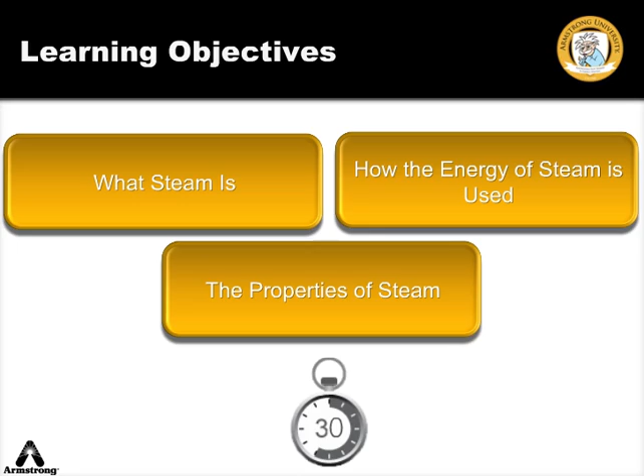Taking full advantage of the steam utility depends on a thorough understanding of its potential and properties. The more you know, the greater the benefit you'll enjoy. To say it another way, the more you know about steam and how to control and use it, the greater the return on the investment in a steam system.

Our journey towards understanding steam begins. Click play to continue.

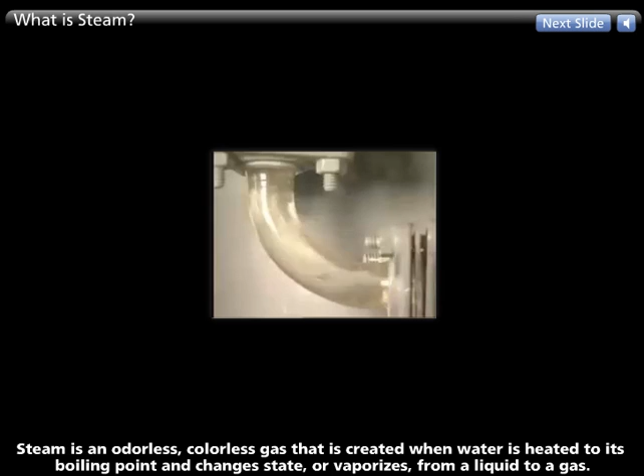Steam is an odorless, colorless gas that is created when water is heated to its boiling point and changes state, or vaporizes, from a liquid to a gas.

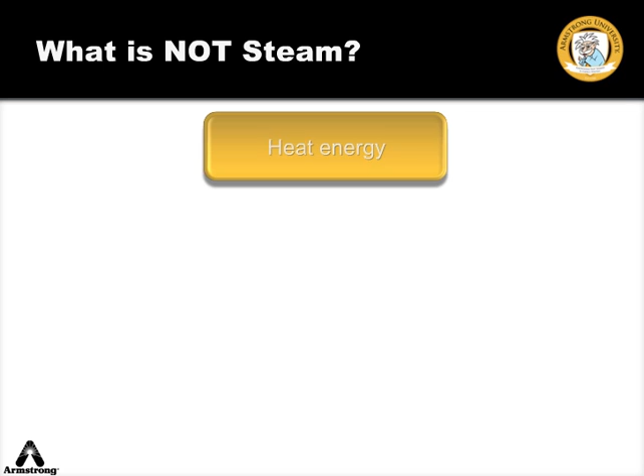When heat energy is removed from steam, it loses its ability to retain a gaseous state and condenses back into a liquid. The resulting liquid is called condensate. The process of condensation happens quickly. The temperature at which condensation takes place is known as the dew point.

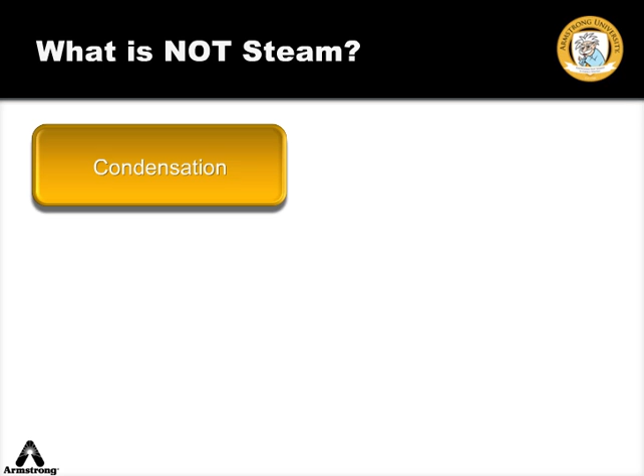There are various forms of condensate that are sometimes incorrectly referred to as steam. These forms, however, lack the molecular makeup of a gas.

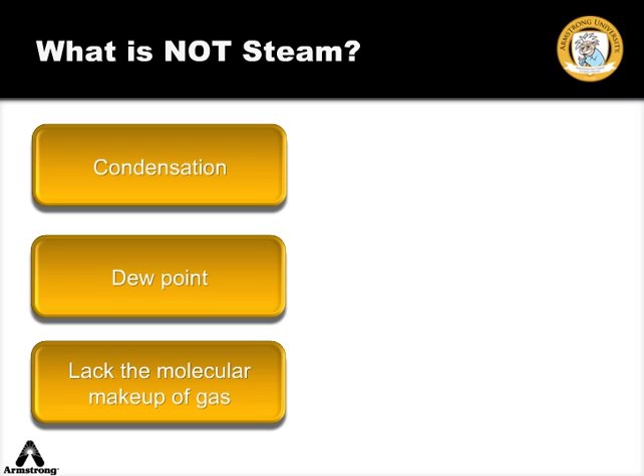Some examples of these are the mist you see rising above relatively warm water on a cool day, which is in fact water vapor condensing in the air. The droplets on your bathroom mirror are formed when water condenses out of the relatively warm air onto the cooler surface of the mirror. Click play to continue.

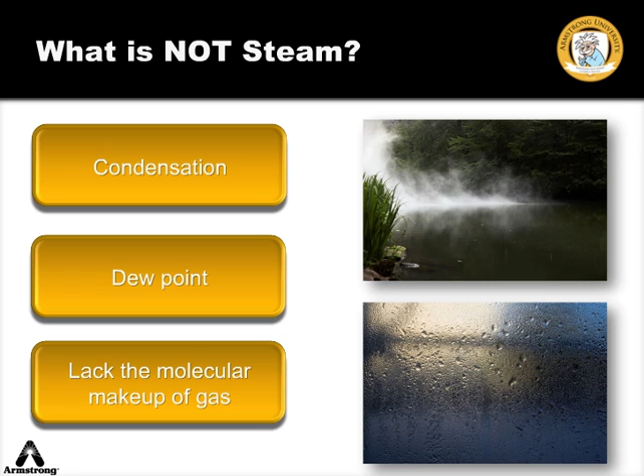Let's take a closer look at steam's practical uses. Click play to continue.

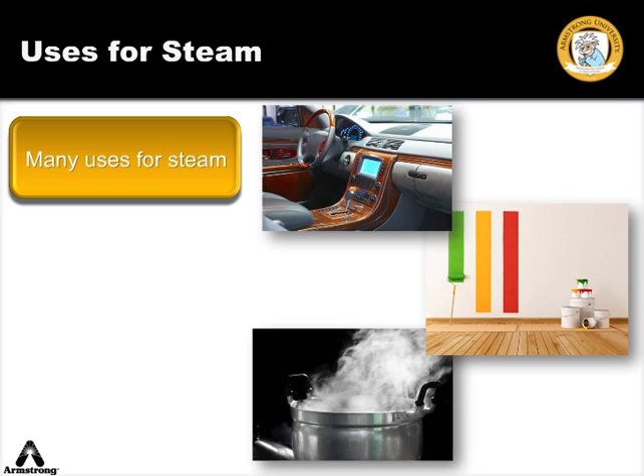We use steam in our everyday life in many different ways. From the plastic and vinyl components of our automobiles to the paints and stains we use on our homes to the preparation and presentation of the food we eat, we use steam to make our lives more comfortable and convenient.

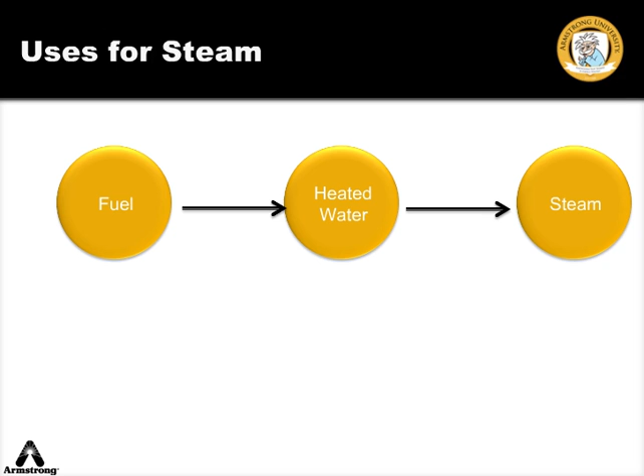Fuel is consumed to heat the water that becomes steam. The gas has value. It contains valuable and useful heat that can be used in a variety of purposes. In fact, steam is used in the manufacturing of more than 80% of the products produced by industry.

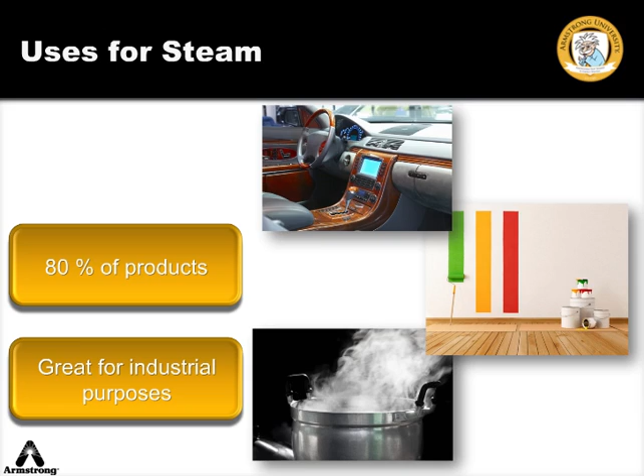Steam has several physical properties that make it particularly suitable and economically advantageous for these industrial purposes. Click play to continue. Let's examine the steam loop. Click play to continue.

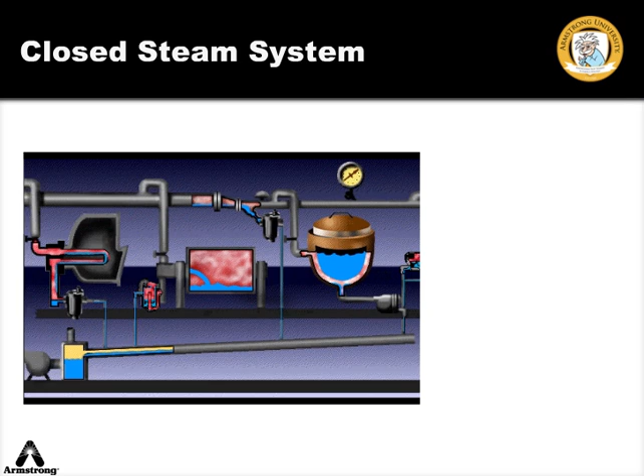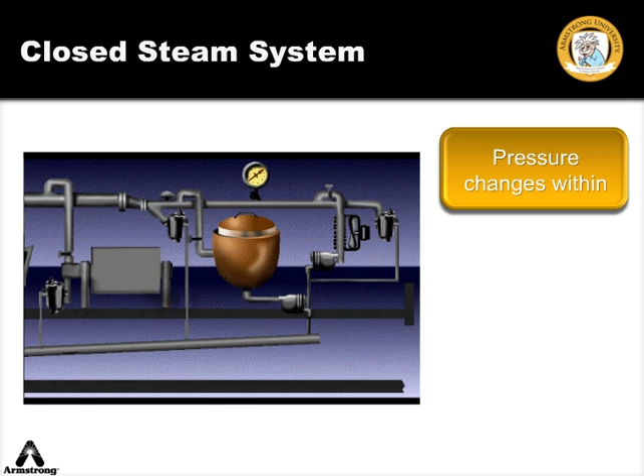Most industrial steam systems are closed systems. When water vaporizes to become steam in the boiler, the expansion pressurizes the system. Steam is forced out of the boiler by its own pressure and is carried by piping to whatever devices are to be employed for heating or processing. The pressure changes within the system provide transportation for the steam and also affects its physical properties.

It is helpful to think of the typical steam system as a loop with 4 distinct sections. The first is generation. During this stage, in the boiler, heat is applied to water to raise its temperature. After the water has vaporized, the resulting steam moves into the second stage of the steam loop, distribution.

This is simply the movement of the steam within a closed system to its point of use. The use, whatever that happens to be, is called heat transfer. This is the third stage.

In the heat transfer portion of the steam loop, the heat of the steam is put to work doing countless jobs. As the steam gives up its heat through heat transfer or use, it condenses or changes its state, this time from a gas back into a liquid. This is called condensate. We'll learn later why it's very important to drain condensate from a steam system as quickly as possible. This is the job of a simple device called a steam trap.

The fourth and final section of the steam loop is condensate return. Since condensate has already been through the steam system, it will take far less heat and fuel to turn it back into steam than it would to make steam of an equal quantity of cold water. That's why a growing number of steam users return the condensate back to the boiler where the whole process starts over, hence the concept of the steam loop.

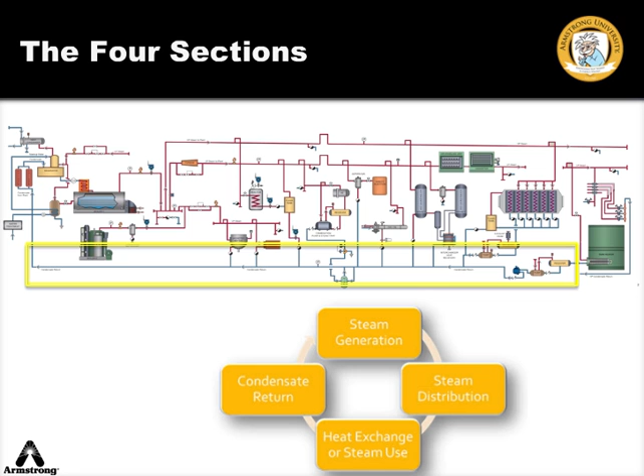A discussion of temperature and heat is essential to an explanation of how water becomes steam. Click play to continue.

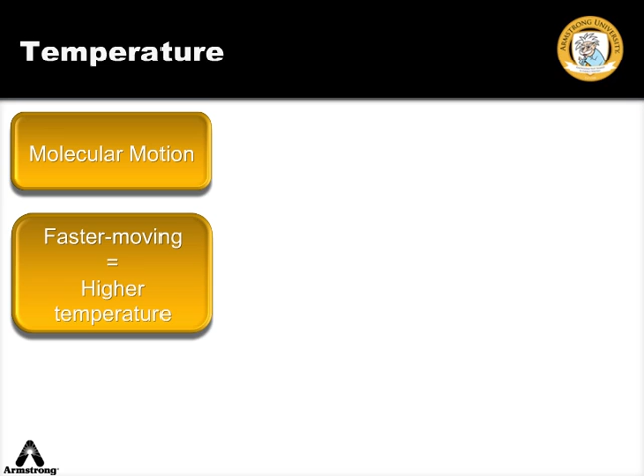Temperature is a measurement of the molecular motion within a substance, like water in a teapot. Faster-moving molecules result in higher temperature. We measure temperature on a thermometer

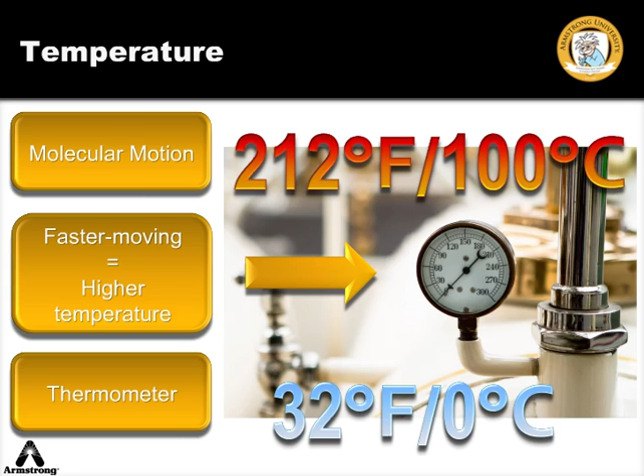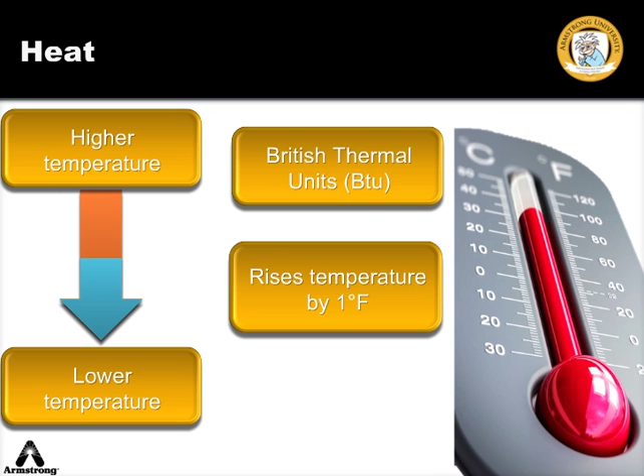which sets the freezing point of water at 32 degrees Fahrenheit and boiling point at 212 degrees Fahrenheit at sea level. Heat is a measurement of the movement or transfer of energy from a body with a higher temperature to a body with a lower temperature. We measure heat in British thermal units, BTU, or kilojoule. 1 BTU is the amount of heat required to raise the temperature of 1 pound of water 1 degree Fahrenheit. In SI units, the kilojoule is equal to a kilowatt second.

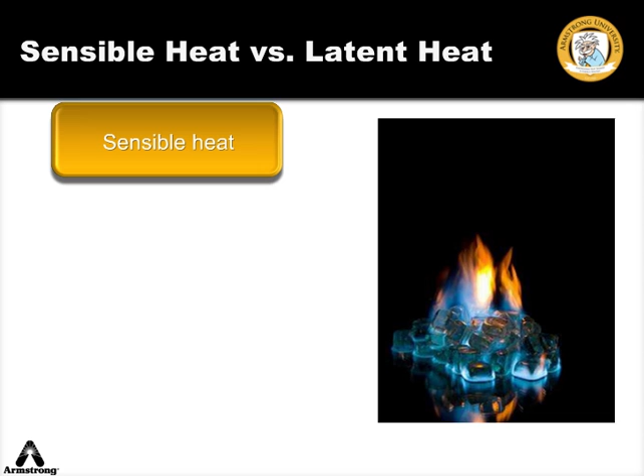Water can absorb only so much heat. This is called sensible heat because it produces a temperature change that can be measured. The amount of sensible heat required to raise the temperature of water from freezing to boiling is called the heat of the saturated liquid. At sea level, atmospheric pressure, that is about 180 BTU per pound of water.

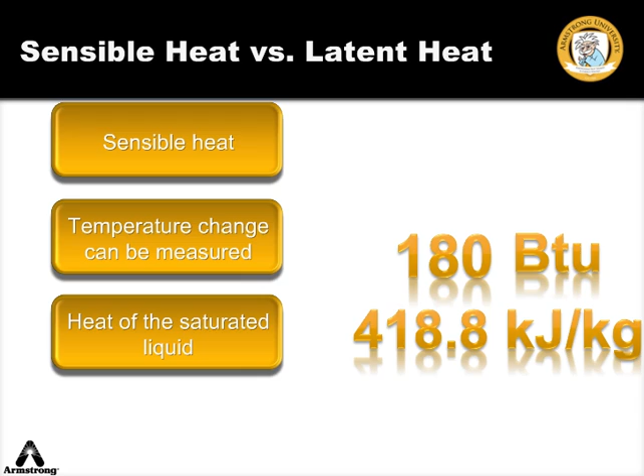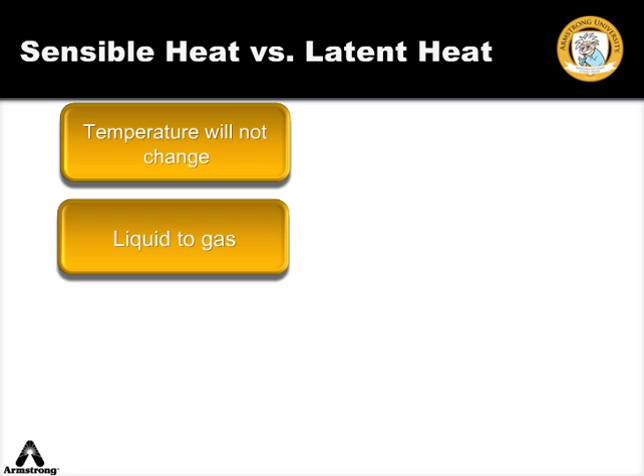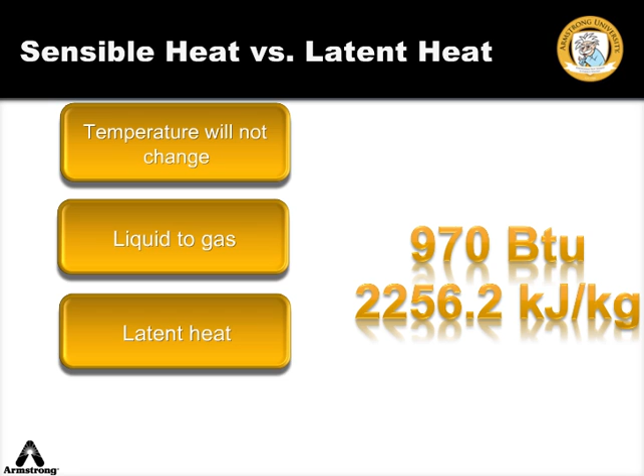Adding more heat to water has no effect on temperature. Instead, it causes the water to change state, or vaporize, from a liquid to a gas. About 970 BTU of additional heat is required to vaporize 1 pound of water into 1 pound of steam. This is called latent heat because it cannot be measured by a thermometer.

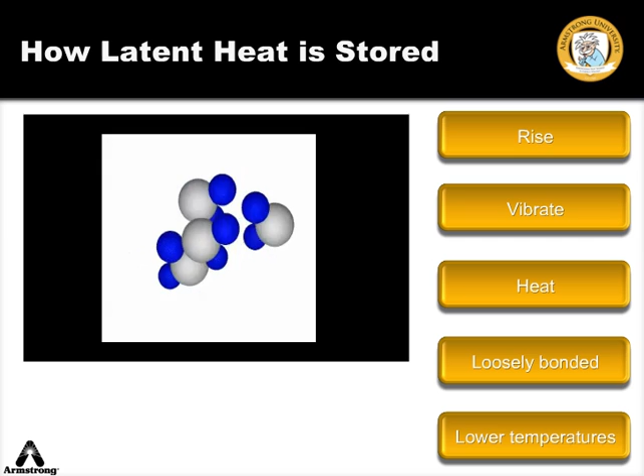Water is made up of hydrogen and oxygen atoms. At lower temperatures, these molecules are loosely bonded to each other. When heat is transferred to the water, the molecules begin to vibrate and the temperature starts to rise. As the heat increases, the molecules vibrate more and more until the bond holding them together is severely weakened. When sufficient heat has been transferred to the water to break the bonds, the molecules explode apart, creating steam.

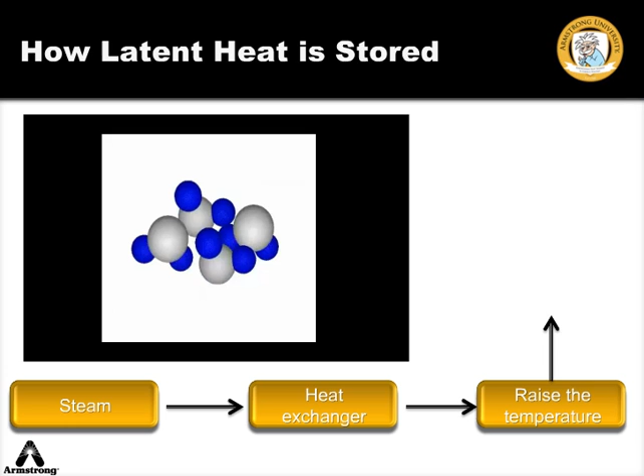After the steam has been transported to the heat exchanger, it gives up its latent heat to raise the temperature of some product or to power some operation. As the steam gives up its latent heat to the work effort, it condenses back into water.

Heat transfer takes place in 3 ways: conduction, convection, and radiation. Let's take a closer look.

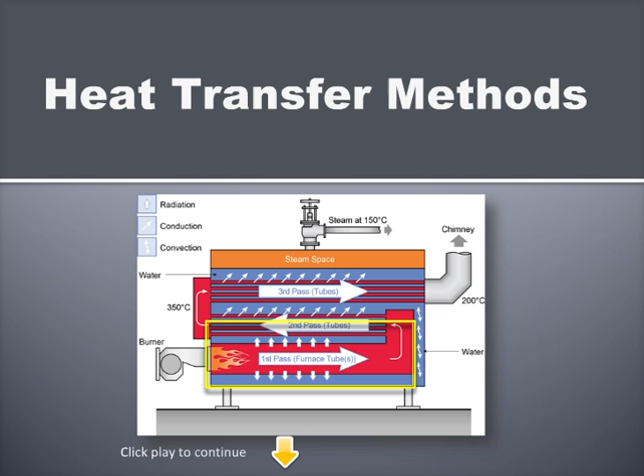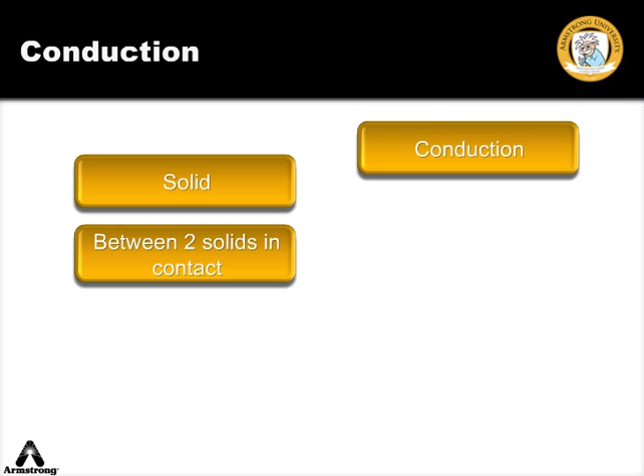Conduction is the form of heat transfer that takes place within a solid. Conduction causes the handle of a cast iron frying pan to be nearly as hot as the bottom. Conduction occurs within a solid or between 2 solids in contact with each other. It is generally believed that conduction occurs on the atomic level, much as the conduction of electricity takes place. Free electrons transport thermal energy from molecule to molecule away from the heat source.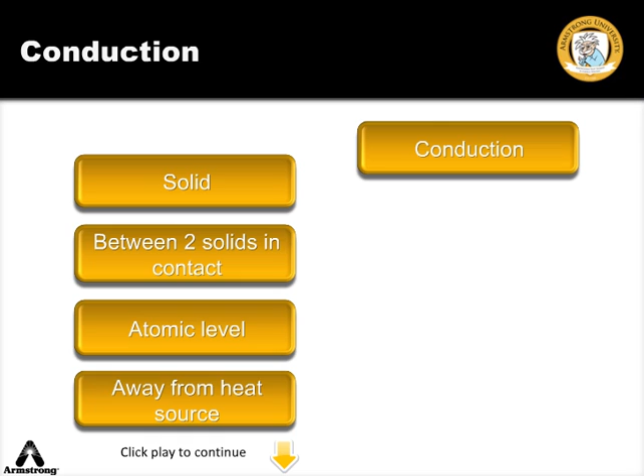Convection is the form of heat transfer that takes place within gases or liquids, or between solids and liquids or gases. Convection causes the air from your heating system to be distributed throughout the room. Convection also requires physical contact. It takes place because of the difference in density in fluids as they are heated and cooled. Liquids or gases are heated and become less dense and rise. As they cool, they become denser and fall. In a system, this cycle of movement is called a convection current.

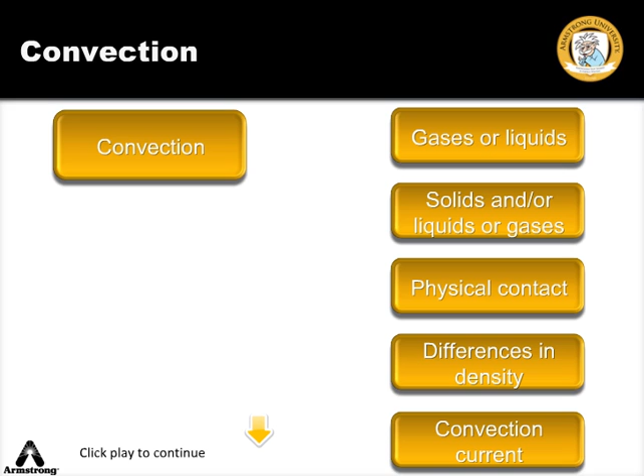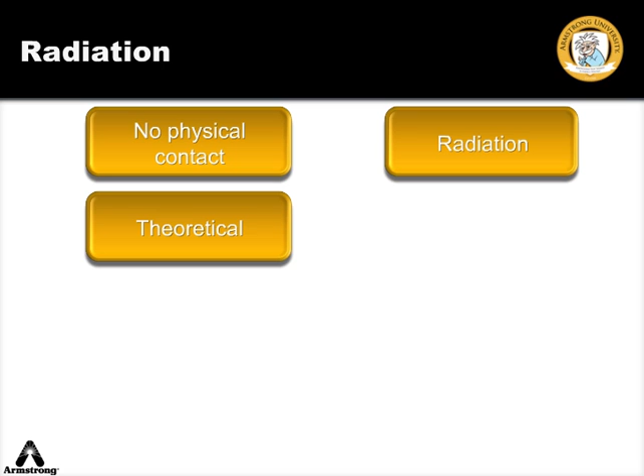Radiation is the form of heat transfer that takes place between 2 bodies that aren't in physical contact. Radiation causes sunburns that many of us get when we've stayed out in the sun for too long. Radiation is the only form of heat transfer that requires no physical contact. While we do know that it occurs because of electromagnetic radiation, usually in the infrared band, much of our understanding of it is still theoretical. We do know that it can take place between 2 bodies separated by a vacuum and is partially explained by wave theory and quantum mechanics.

Often, heat transfer occurs as a combination of the methods we've discussed. For example, fire heats a frying pan by convection. The heat is then transferred from one side of the frying pan to the other by conduction. The egg in the pan is cooked by conduction heating.

Steam is complex. When we break down its properties and begin to understand them, we become closer to using the power of steam wisely.

In thermodynamic analysis, pressure is expressed in pounds per square inch above a perfect vacuum. This is called absolute pressure and is abbreviated PSIA. Steam pressure is usually measured in gauge pressure. The units are pounds per square inch gauge, or PSIG. It is a measure of pressure above atmosphere, at sea level. Below atmospheric pressure, steam is measured in inches of mercury vacuum.

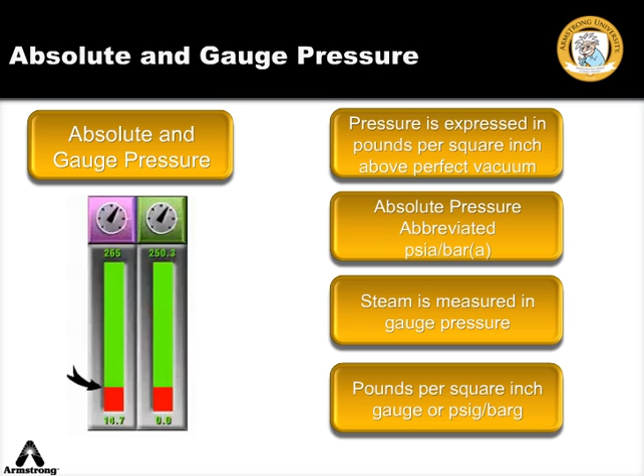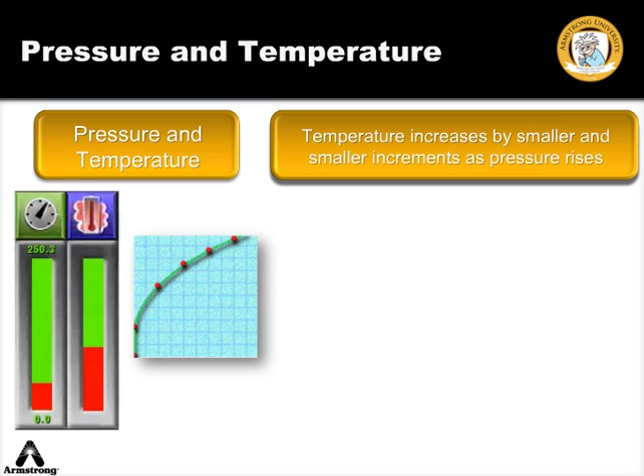As steam pressure increases, so does the temperature, but by smaller and smaller increments as the pressure rises. There is a corresponding temperature for saturated steam for any given pressure. It is this fixed relationship between pressure and temperature that allows for precise temperature control in steam systems.

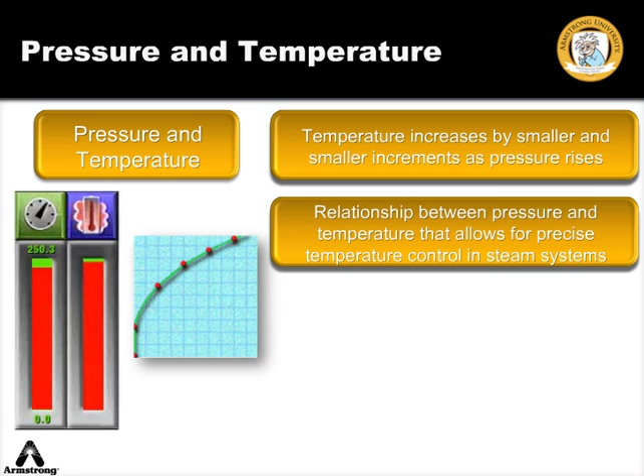Rising pressure in the system has an inhibiting effect on molecular movement. When water is subjected to higher pressures, more heat energy must be applied, and therefore higher temperatures must be reached before it can undergo the process of vaporization.

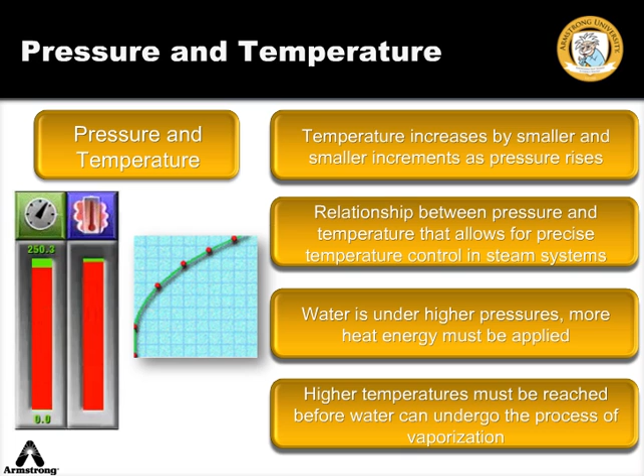As steam pressure increases, so does the heat of the saturated liquid. The amount of heat required to raise the temperature of a pound of water from 32 degrees Fahrenheit to the boiling point at a given pressure and temperature is expressed in BTU, British Thermal Unit, or

kJ/kg. This occurs for the same reasons that the steam temperature rises with pressure. Again, the heat of the saturated liquid increases as the steam pressure increases.

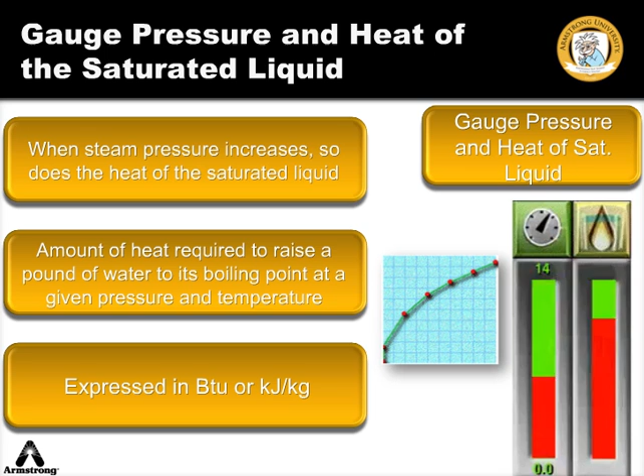As steam pressure increases, the latent heat of the steam decreases. The amount of decrease diminishes as the pressure rises.

Since it is the latent heat available for heat transfer that provides steam's greatest utility for non-temperature dependent processes, it should be apparent that lower pressure systems are most suitable for those applications.

The decrease in latent heat occurs because there is a physical limit to the amount of heat that water can absorb in any state. As the amount of heat used to raise the water temperature before vaporization can take place increases, the amount of latent heat used to accomplish that vaporization must decrease.

At approximately 3,206 psia, the amount of latent heat in the steam drops to 0 BTU per pound. 3,206 psia is the critical pressure for water.

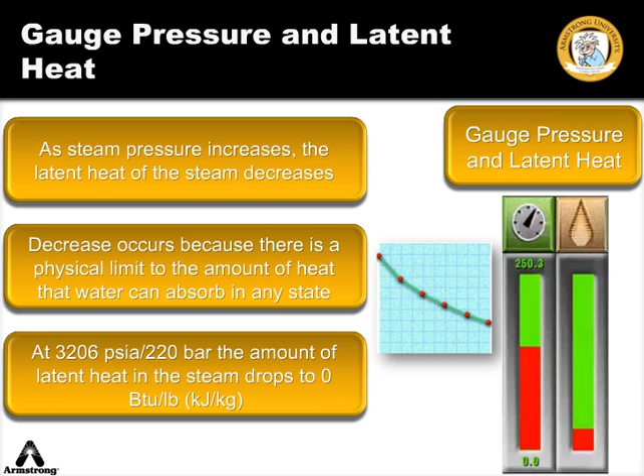At that pressure, it absorbs the maximum amount of heat while in the water state and requires no more heat to turn it into a gas. At this pressure, water can exist either as a liquid or a gas at the same temperature.

Add the figures for the heat of the saturated liquid and the latent heat together, and the sum is the total heat of the steam. The total heat of the steam increases with the system pressure up to approximately 435 psig.

The amount of latent heat added to vaporize the water begins to decrease rapidly relative to the increase in sensible heat needed to bring the water to boiling temperature. This results in a decrease in the amount of total heat in the system as the pressure approaches critical for water.

The amount of heat available from any medium in its current state is referred to as enthalpy. For steam, the enthalpy of the vapor is the same as the total heat of the steam. This is the sum of the enthalpy of the liquid, heat of the saturated liquid, and the enthalpy of vaporization.

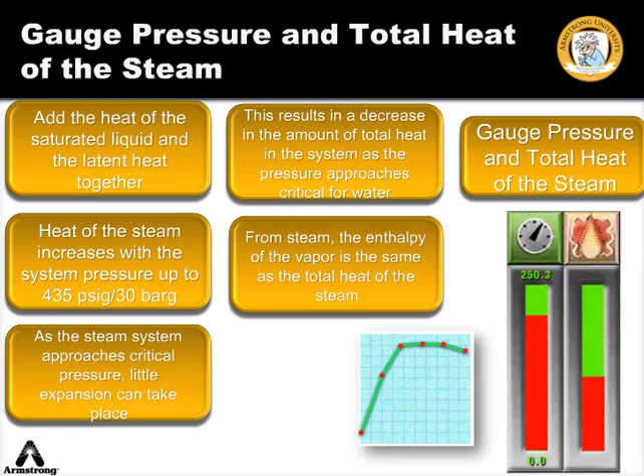Differences in density are generally referred to by the measurement of specific volume. The unit of measure for specific volume is cubic feet per pound, or cubic meters per kilogram.

As pressure increases in the system, the specific volume of the liquid rises marginally. Water is incompressible and therefore is not affected by steam pressure.

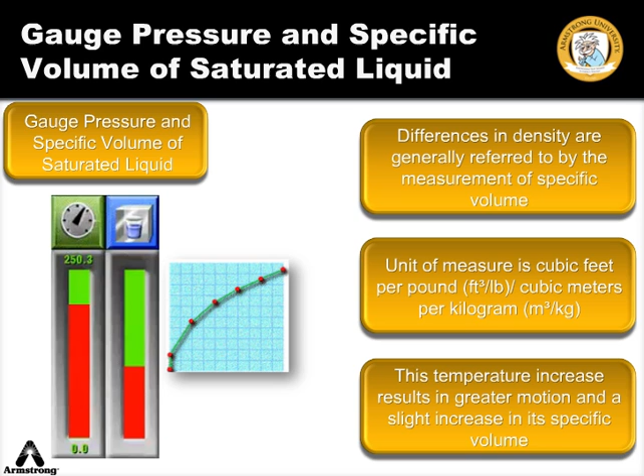As pressure increases, however, so does the steam temperature. This temperature increase results in greater motion in the molecules of the water and a slight increase in its specific volume. The specific volume of steam decreases as the system pressure increases.

At atmospheric pressure, a pound of steam occupies about 1,600 times the volume of a pound of condensate. As pressure increases in the system, the specific volume of the steam decreases.

Because of this principle, a greater quantity of steam is available in a smaller space, pipe, or heat exchanger at higher pressures. This is why steam is often distributed at higher pressure but is reduced to a lower pressure to perform specific heat transfer functions. Rising pressure constrains the molecules from moving apart when water vaporizes.

At the critical pressure of 3,206.2 psia, the specific volumes of liquid and gas are equal.

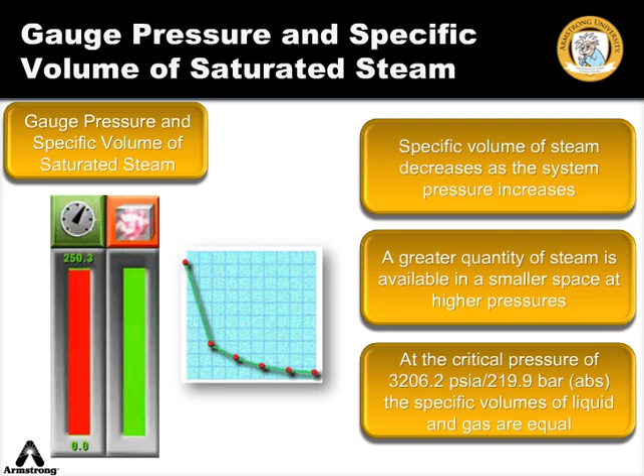All of the properties of steam we have reviewed are interrelated. From any one known value, you can determine any of the others. These relationships are all displayed on a table called the Properties of Saturated Steam, or simply the steam tables.

For a given pressure, you can read the steam temperature, the heat of the saturated liquid, the latent heat of the steam, the total heat of the steam, the specific volume of the saturated liquid, and the specific volume of saturated steam. The following measurements are expressed in imperial values.

If you know that you need a temperature of 307 degrees Fahrenheit, the table tells you that you need to pressurize the system to 60 psig.

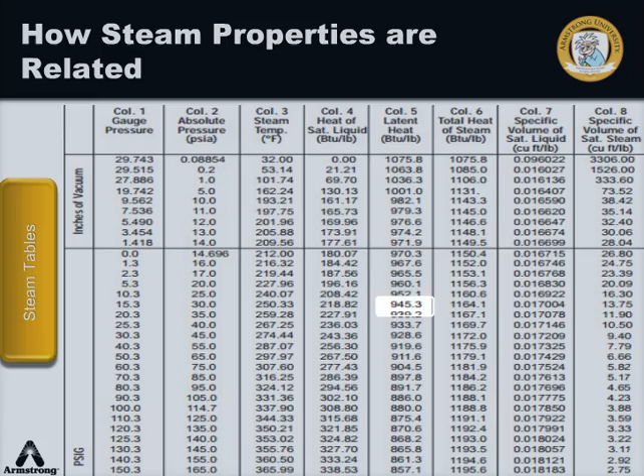If you have a 15 psi steam supply, the tables tell you that you have 945 BTU per pound of heat energy available to do work.

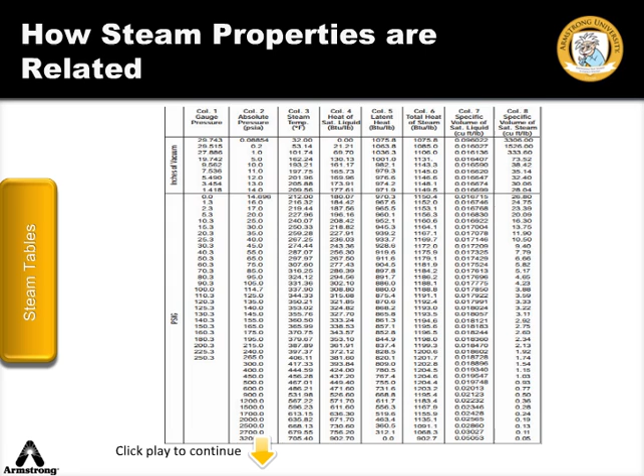In this course, we learned steam and identified what steam is, learned how the energy of steam is used, and identified the many properties of steam.